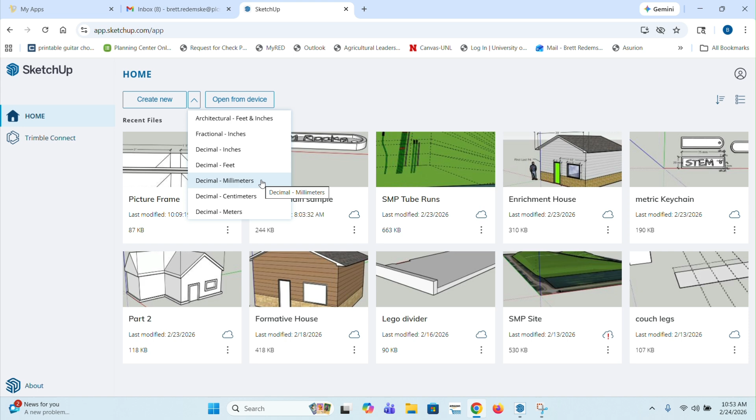So click on that, you're going to start a blank template. If you get the blue banner, you can close that. We do need to get rid of Ty, he's going to be too big for our model, so we click on him once and hit backspace to delete.

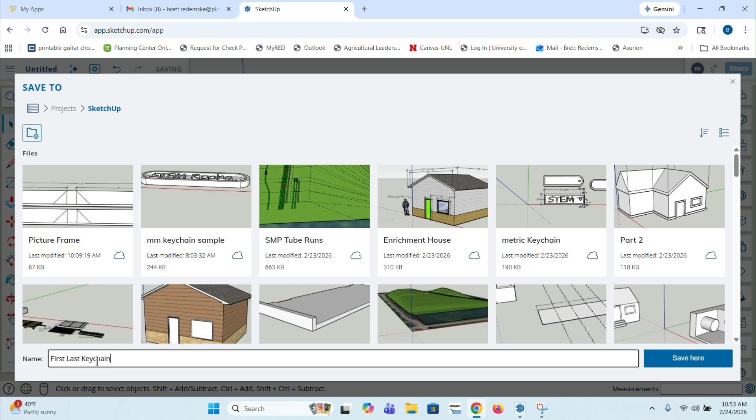Now we're ready to start our file. Before we do that, we are going to name the file so it's there in case we need it. Click on this untitled. If it asks you to purge, always purge all. Click on the folder here, and then name the file your first and last name, then keychain. So it'll be your first name, your last name, and then keychain as the title. Then you'll save it, it'll say saving, and once it's saved it'll show your first and last name and keychain over here.

We are ready to start. We're going to show you multiple shapes, make multiple shapes, and you're going to pick the one you want to use and go with that. So we're going to start with our rectangle tool, which is the R key.

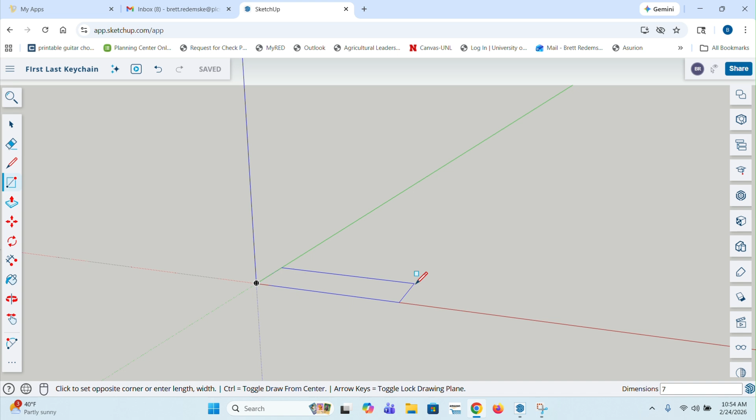We're going to come right here to the origin. Now it's going to look really tiny once you enter this in, so we'll zoom extents. You're going to click once and let go of the mouse, drag it out this way. Our rectangle is going to be 75 millimeters by 20 millimeters, so we're just going to type 75. If you look in the lower right-hand corner, you'll see it, 75 comma 20. Hit enter, and you see it basically disappeared.

So we're going to do our zoom extents, which is Control-Shift-E, and zoom right in on that rectangle. So this is 75 by 20, that's what we want to have. We're going to first make our rectangle one.

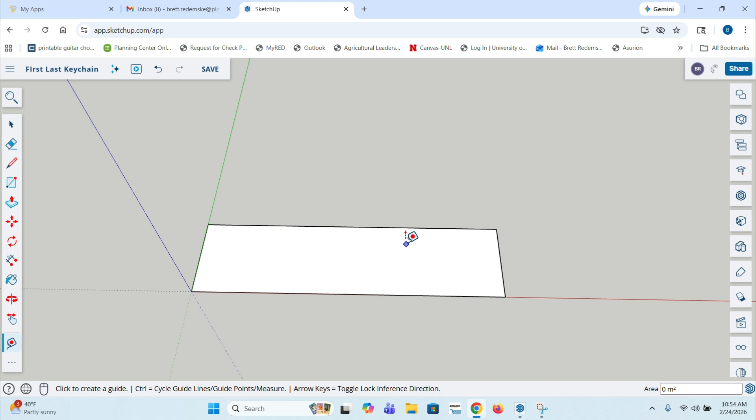It's a little easier. Once we have the base, we have to start doing some layout for the hole for the ring, for the keychain ring. For that, we're going to use our tape measure tool, which is the T key. We're going to click on this edge, click once and let go, and we should have our guideline here. If it doesn't show the guideline, you should be able to tap the control key to get that going.

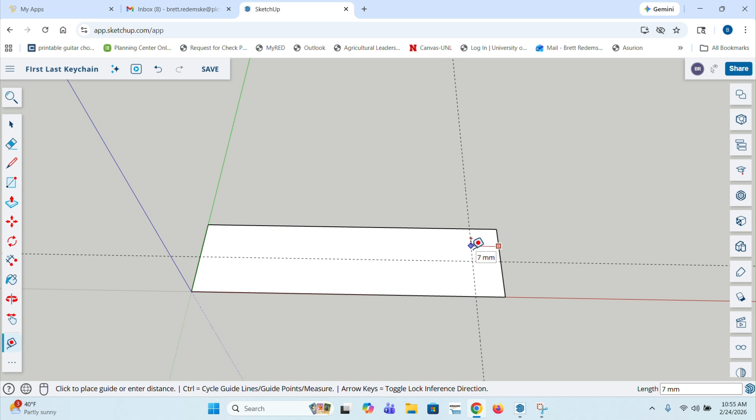What we're going to do is find the midpoint on this edge, so it should be showing in the lower right-hand corner at 10 millimeters. We're going to click once, and we need to set the distance in for the hole. So we click on the end once, bring it in, and make that 7 mils. Type 7, enter, and we're going to have a mark at 7 millimeters. So this should be 10 millimeters in, 7 millimeters back.

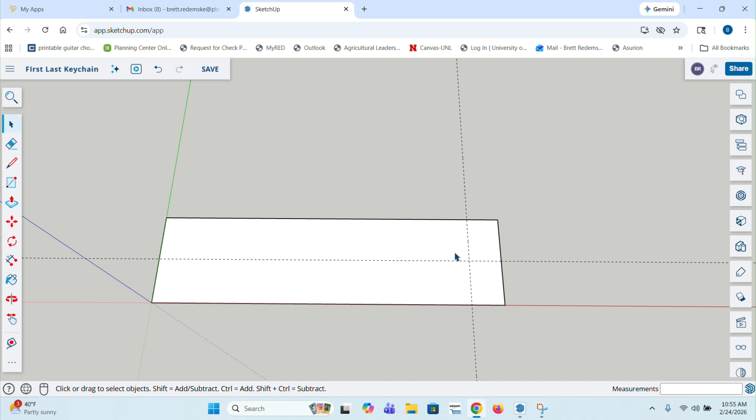Next we're going to do the circle, to make a circle for the opening. We're going to make it flat, so when we pull this up to the right thickness, the hole's already there. We're going to use our circle tool, which is C, and put our cursor right here on this intersection, so it shows intersection. Now here's the trick: when you use the circle tool and enter the size, you enter the radius, half the circle. We want a 4 millimeter circle, so we're going to do a 2 millimeter radius. Click once on the intersection and move your cursor out along the line, type 2 for 2 millimeters and enter. Now we have a 4 millimeter hole.

Now hit the space bar so we have our select tool back, and we're going to save real quick so we don't get too far out. Once that's saved, come back and click on the inside of the circle, make sure it's highlighted. Single click, not double click, and delete it so that is empty. Then erase those guidelines and go back to the select tool with the space bar.

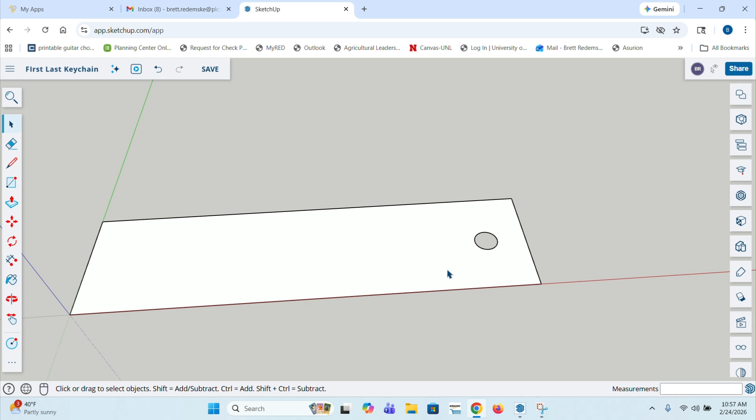So now we have this. We need to make this the correct thickness. This base layer, if you looked at the examples, has the base thickness and then there's the text and stuff on top. So this base layer is going to be 2 millimeters.

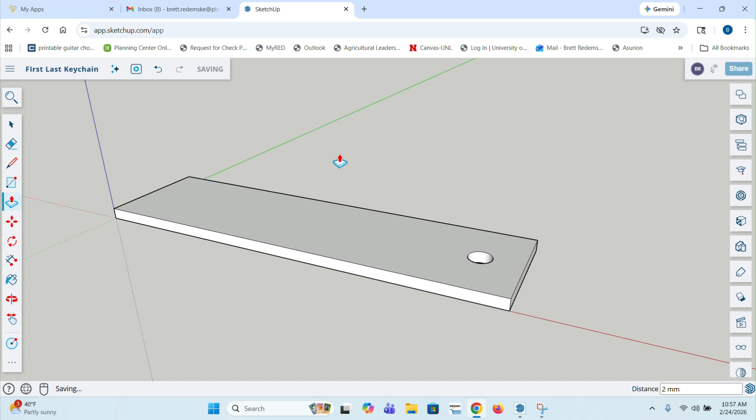We use the P key for our push-pull tool. Highlight that, click once and let go of the mouse button, then push forward on your mouse to bring it up. Type in 2 for 2 millimeters and enter. Now we have a 2 millimeter thick base. Save to make sure we have that, then go back to our select key for a second.

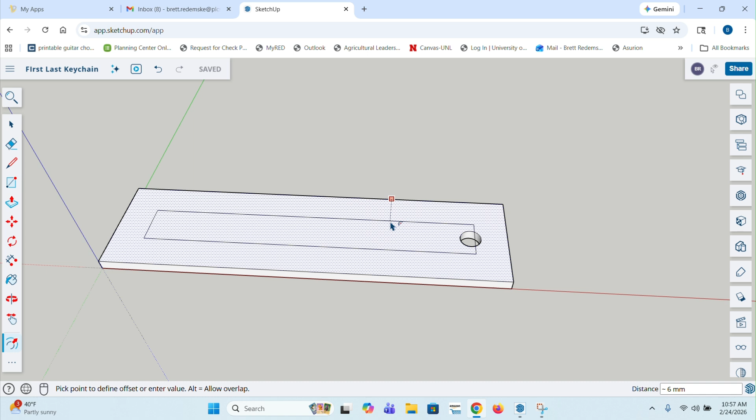Now what we need to do is put the border on this. We're not going to raise it up yet, just put the border on here. For that, we use the offset tool, which is the F key. Hit F and highlight this top edge, click once, then move your mouse toward the middle. Again this is 2 millimeters, so type 2 and enter, and it's going to give us a border. Once we've got that, hit the space key and save that.

We're going to pause here. I'm going to show you how to make the rounded keychain, and then we're going to show you how to add the text, which works the same on both. Once we get the text on, we'll raise up the walls around the side of it. So that's our square, rectangular one.

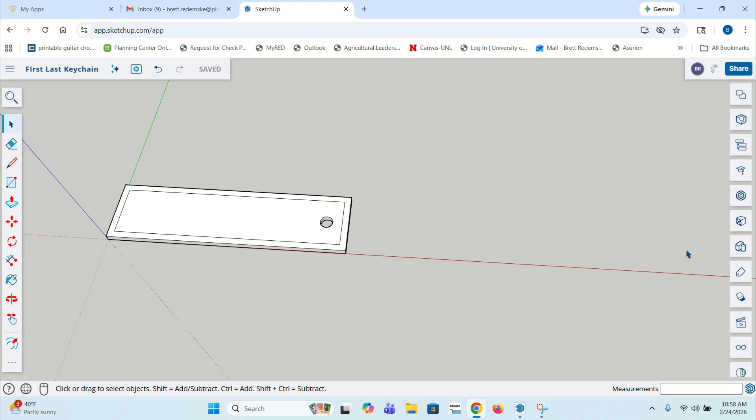We're going to come right over next to it and make our rounded one. We start the exact same way with the rectangle tool, the R key. Click once, bring it out this way. It's going to be the same dimensions, 75. So type 75, comma 20 — look in that lower right-hand corner for the dimension, 75, comma 20 — hit enter, and we'll get the same rectangle.

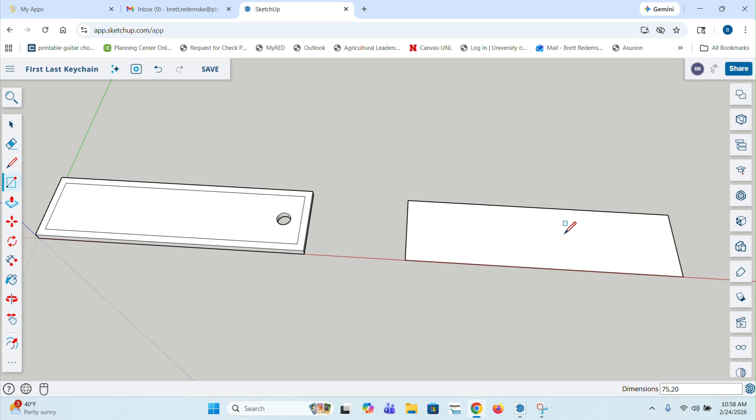Our first couple steps are going to be the same. Take the tape measure tool with the T key, click once on that edge, bring it into the midpoint, just like we did that halfway at 10. We're going to click on this edge and come back 7 mils, type 7, enter. We're also going to come down to this end and type 7, enter, for 7 millimeters.

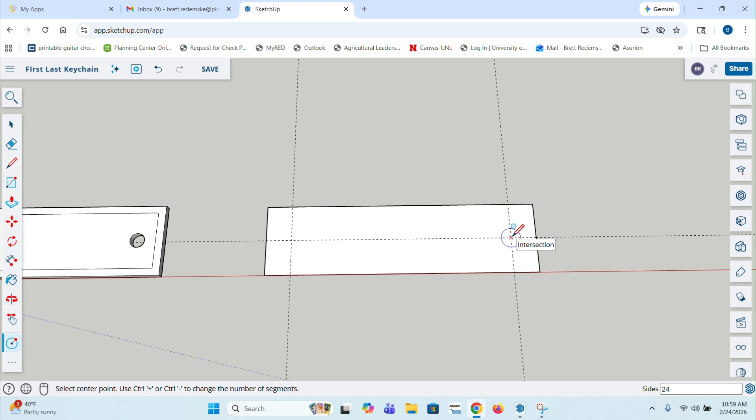We are going to still do the hole up here, the opening. Come up here with the circle tool, the C key, click once on the intersection and let go of the mouse. Come up on the guide, type in 2 for the radius of 2 millimeters, then click on the circle and delete it with the select key. Now, do not erase those guidelines yet, we need those. So real quick, save.

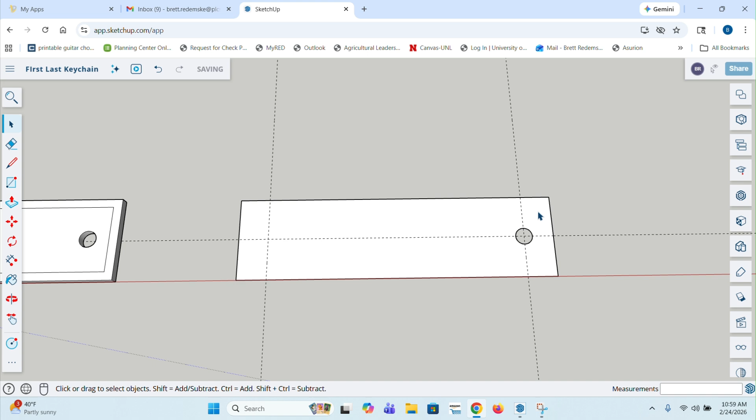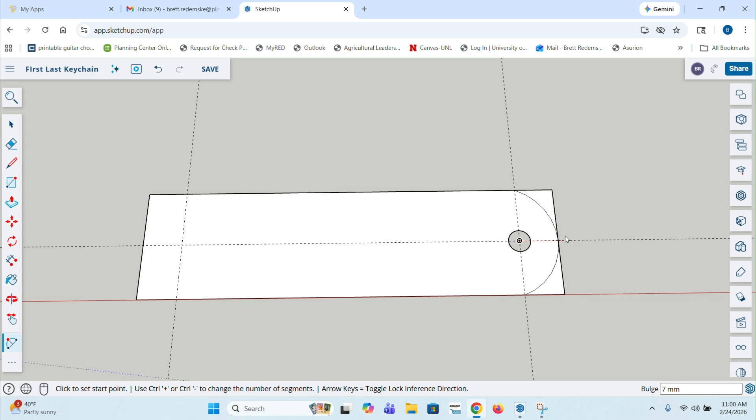What we're going to do to put the arc and the curved ends is our arc tool, which is the A key, so just tap the A key. We're going to utilize these intersections of the dotted lines and the edge. Click once on this intersection, click once on this intersection, and bring your cursor right to the intersection of the edge and that, and click one more time. That gives us this nice end here.

So we're going to come down to this end and do the exact same thing: A key, click once on this intersection, click once on this intersection, and then click once on this intersection. Once we've got that done, save.

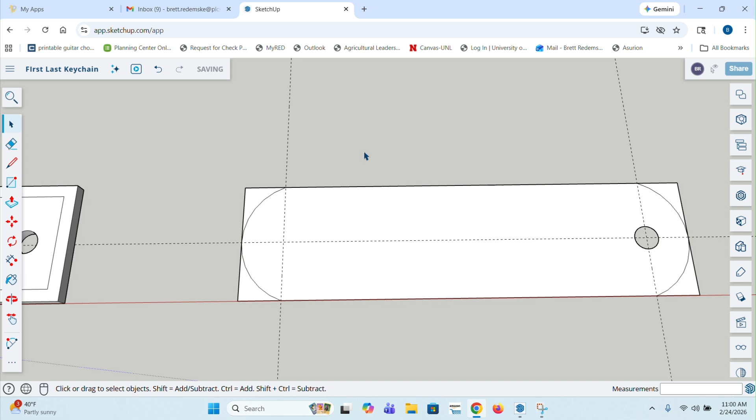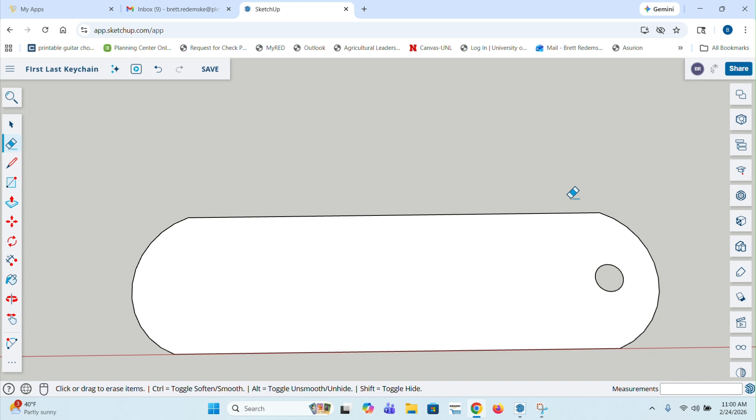Now we're going to use our eraser tool. We're going to be very careful and only erase these 2 lines here, and these 2 lines here, erase the guideline. Coming down here, erase these 2 lines, erase these 2 lines, erase the guideline, and save.

Now we're going to push-pull this up 2 millimeters. So, P key for push-pull. Click and release the button, push forward, and type 2, enter for the 2 millimeters.

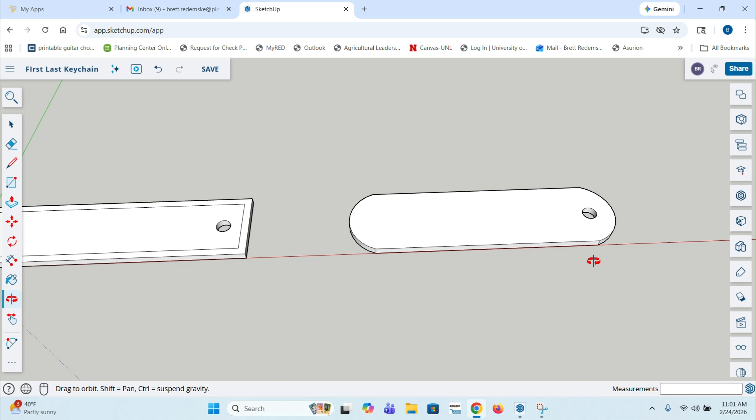Then we're going to offset this 2 millimeters again. So, F key for the offset. Click once, bring it in, and type 2, enter. Then save this. So now we have a square one and a rounded one.

Now you have to make a choice a little bit, which one you want to do. You can also do a combination where one end is rounded. If you do one end rounded, one end square, make the hole end the rounded one so it moves a little easier throughout the key ring.

Once you've got that, you're going to pick which one you want to use and what text you want it to say. It could be your name, it could be something about school. It needs to be school appropriate, though. Just saying. So we'll test it out on this round one here.

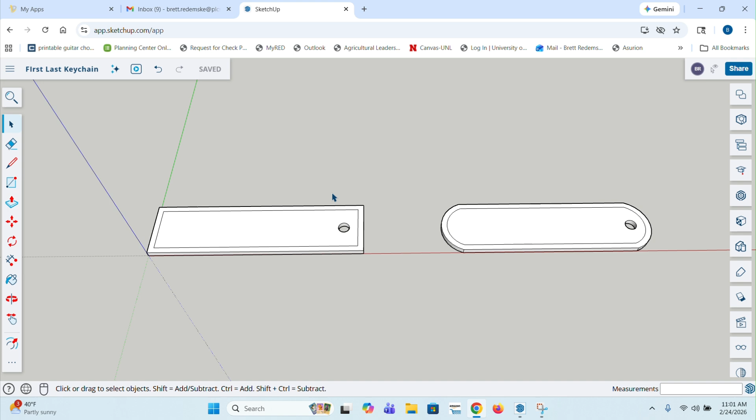I'll show you this text works the same way. So what you're going to do is go to the bottom left corner here to your tool palette extension. We're going to come over here to the 3D text. So you click on that and you're going to get this bubble.

First thing you got to do in this pop-up is put in what you actually wanted to say. So I'm going to say STEM rocks, just because. Make sure I spell it right. All right.

Now, I will tell you this Architect's Daughter font, you can choose your fonts, doesn't work the greatest. Any of the really skinny fonts don't work very well because the printer can only print so small. So something like Concert One works because it's nice and big there. Oswald works well. Permanent Marker works okay. Prompt works okay. Roboto's, oh, it's okay. But I'm going to go with Oswald for this one.

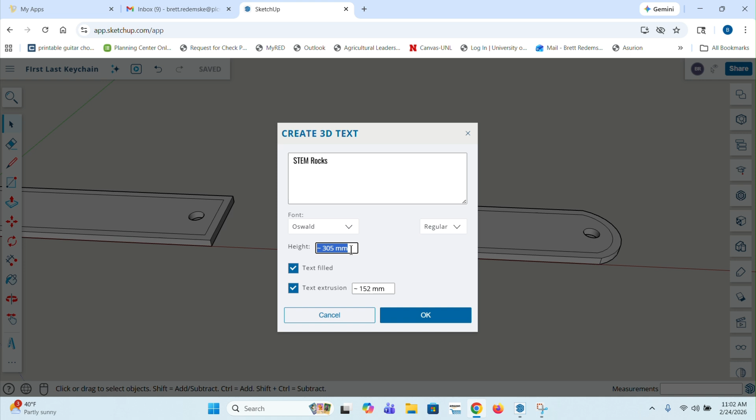Now, the height, that is how tall the letters are. So our opening in between, if you look outside, that's only 16 millimeters. So we want to have a little bit of space. So for the height, you're going to double click on that, change it to 12 millimeters. And the extrusion, which is how tall it is when it prints, that's going to be 2 millimeters.

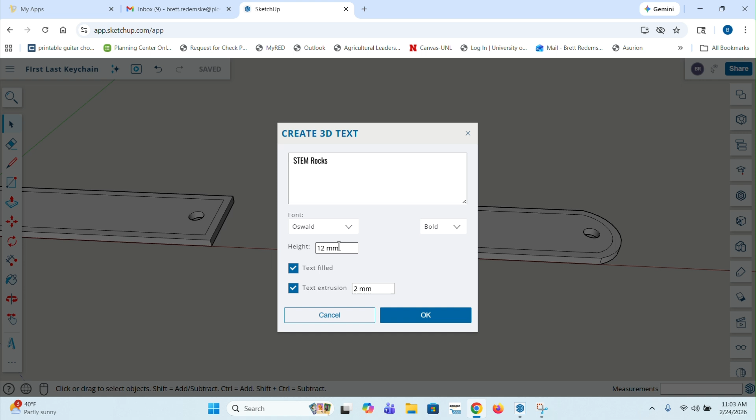So put your wording, pick your font, and you can choose bold. That also sometimes helps to make it a little bit thicker. Some of those letters, depending on your font, can also make it really hard to see. Then height is 12 millimeters, extrusion is 2 millimeters. Once you've got that, you're going to click OK.

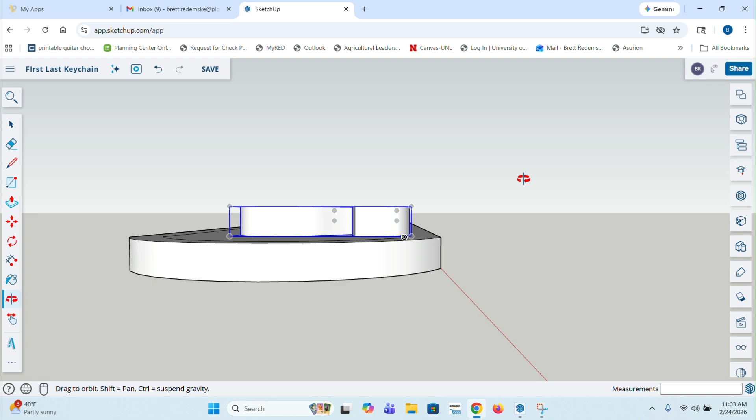Now it's going to bring your words here, and they're going to be a little bit bigger than your piece. That's okay. But what you want to do is make sure you lock them down to the face. So I'm going to go right on the end point of this line on my offset to make sure that group of letters is on the face.

Then what we want to do is center it kind of front to back here, left to right. So we're going to hit the move tool. We're going to grab that endpoint and center it, and it'll usually give you an on face 2 millimeters right next to my cursor there.

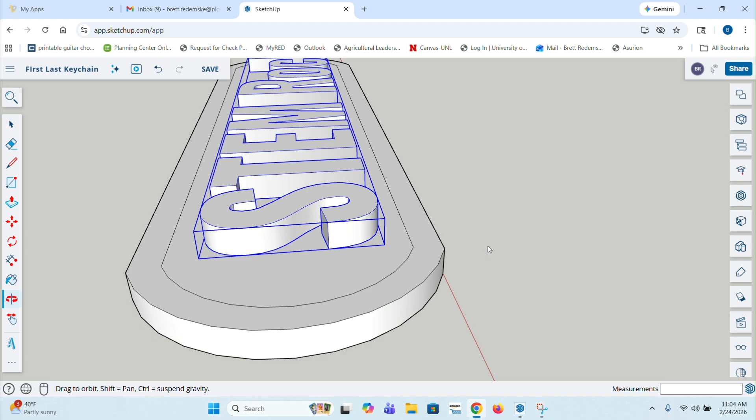So I'm going to click and lock that in place and go back to my select key. So I could bump this back here just a little bit if I wanted to, move it a little closer to the end. I don't want to go where it's going to run into the wall, but there we go. So you see it still sticks out past the end here.

That's okay. What I'm going to do first, before I move anything, is save it so my text is there.

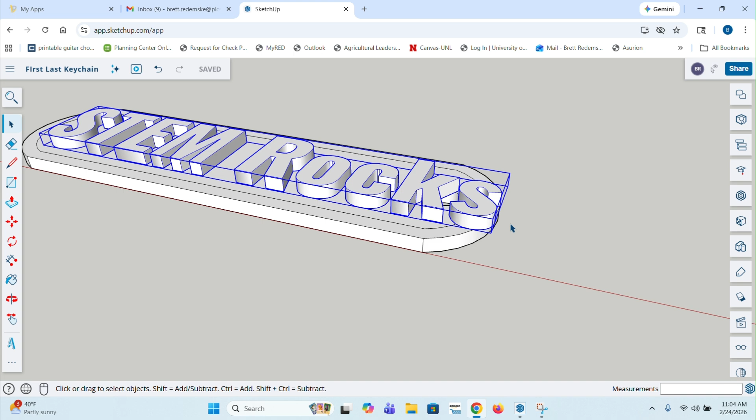Now, to make that go back, we're going to have to use the scale tool, which is not on your shortcut sheet. But we want to look at this end here, and we're going to hit the S key for scale.

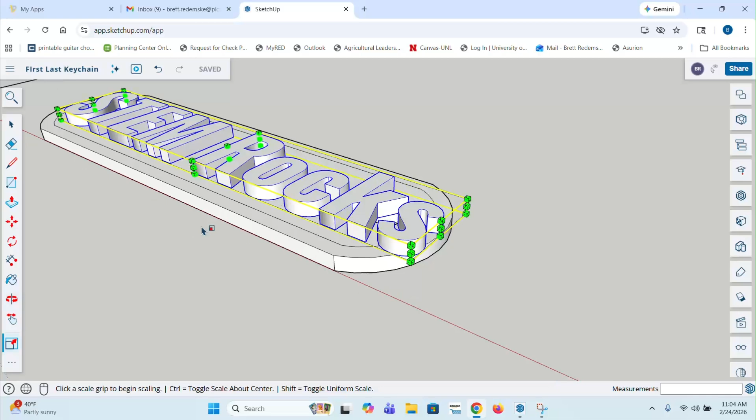Now, if you click any of the top or bottom ones, it's going to make it taller or shorter. We don't want to do that. We just want to make it fit on the piece. So if we've got the height set at 12 when you made it, it's locked in there. So what we're going to do is take this center one on the end.

I'm going to click once on that and then just move it in. Now, see, it kind of scrunches it up a little bit, but it makes it fit. So depending on what you have, depending on what font you have, it can scrunch it a little bit.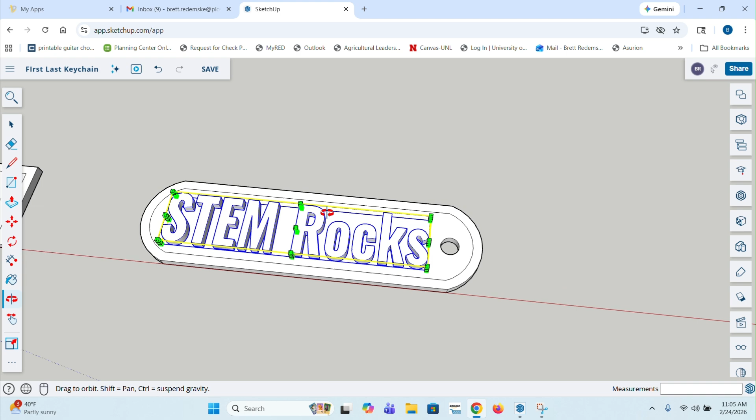And I've got it just a couple of millimeters in past that so that I don't break the letters off with the key ring. So once I've got that on there where I want it to fit, it's about 2 mils on top and bottom, you're in a little bit from the end there, clearing the hole for the things. You're just going to go space key and then click off of that.

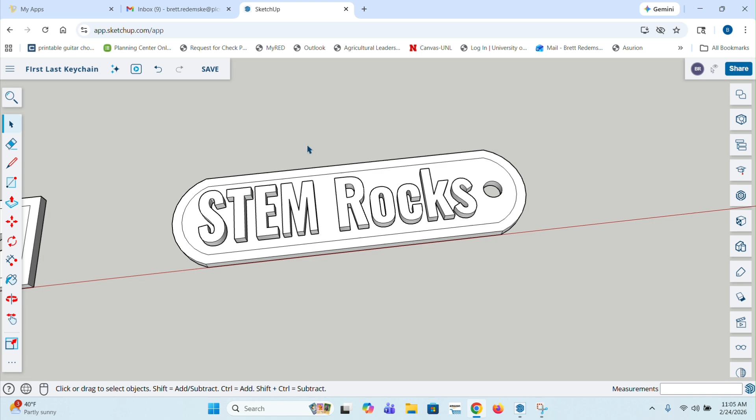What we're going to do then is come here and we are going to go back to this base. We're going to select the outline. You can do this on the round or the square, whichever shape you want to do. So then we're going to do the push pull key.

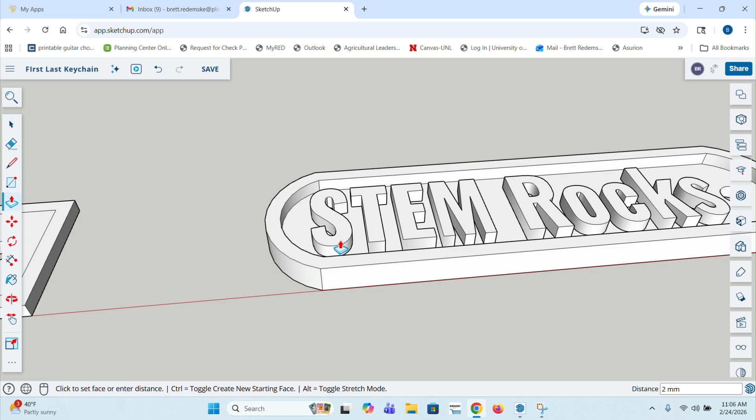We're going to click once and push it forward and type in 2 millimeters. So 2, enter, so that it is the same height as the letters. And once you have that, hit save. So this is what it's going to look like when you print it.

It's going to have the hole. It's going to have the raised edge that helps protect the letters that are on there. It'll have a solid back to it.

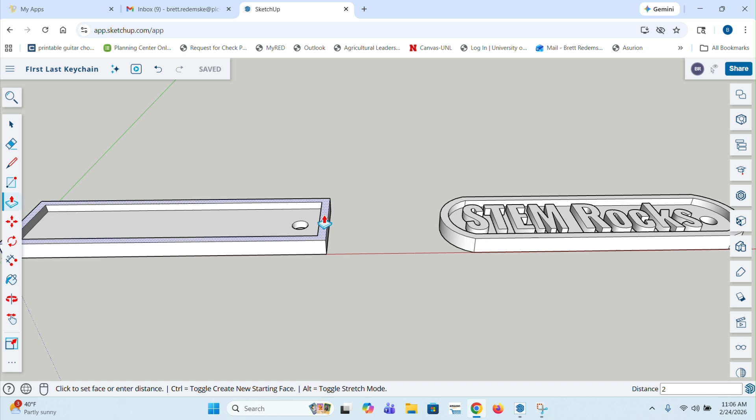Okay, so again, it could be like that. It could be on the rectangle. You'll do the same thing. Once you get the text, it'd be up 2 millimeters. You'd have your font in there.

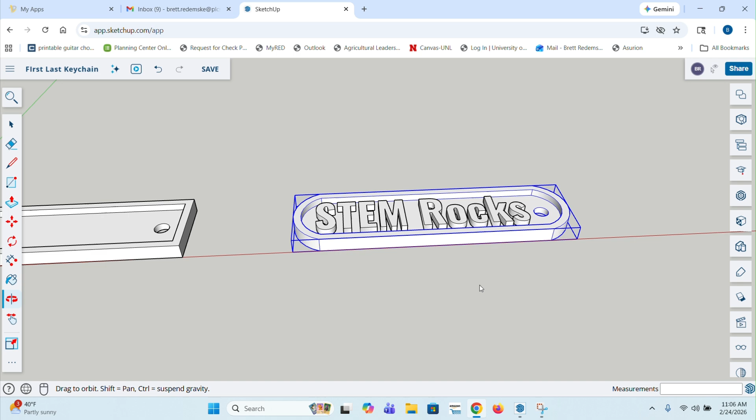Okay. So what you're going to do then is when you have this, you're going to click on the base. You're going to triple click so that all of the base is selected. And you're going to right click with your mouse and say make group so that that base is all one piece. It has to be one piece for the 3D printing to work.

And while that's there on the select tool, you've got that selected. You're going to hold the shift key down so we get the plus minus, and then you're going to click on the letters. They were already a group. So once they're both selected, you're going to right click and make that a group.

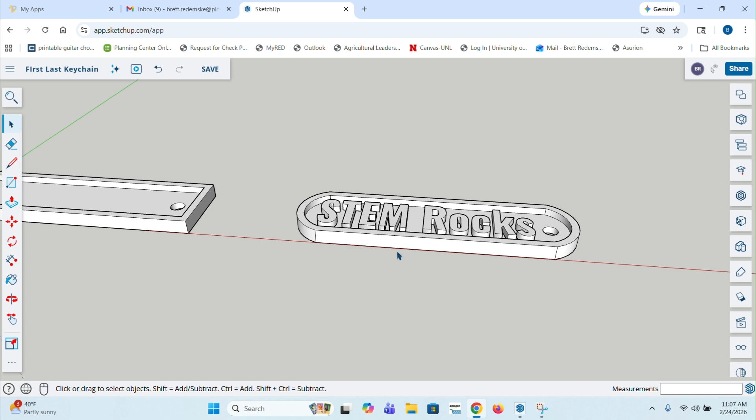So now when you click on it, the whole thing lights up. All right, save that. And then what you're going to do is once you've got figured out which one you're doing with your words, you're going to take the other pieces.

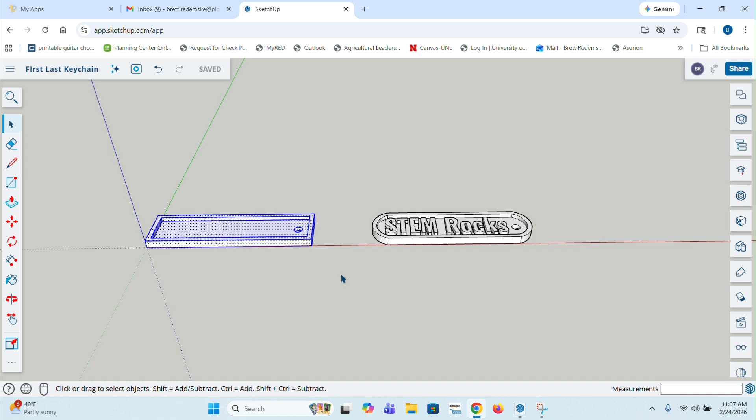You can either triple click or you can just drag and select the box around them. Those need to get the yeetus, deletus, and go bye-bye. So delete those out. Then you want to take this one and move it toward the origin here like that.

Once you've got that so that the only keychain that's on there is the one you're going to print, you're going to save that one more time.

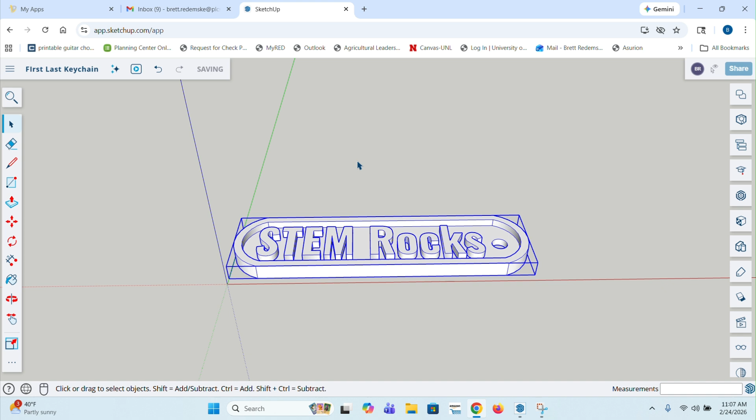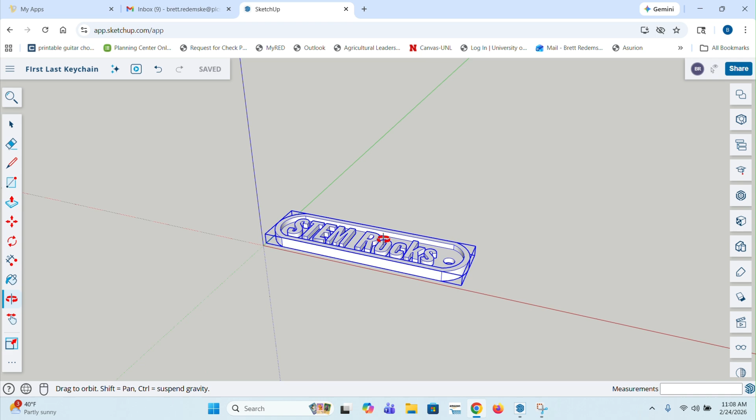Once you have that done, I'm going to show you a video later on. You've got another video that shows how to change the file type and download it properly and send it to me so that I can 3D print them. But that's what you should have: one final keychain, either the rectangle, the round, or a combination of both, with the correct dimensions and your words on there in one big group.